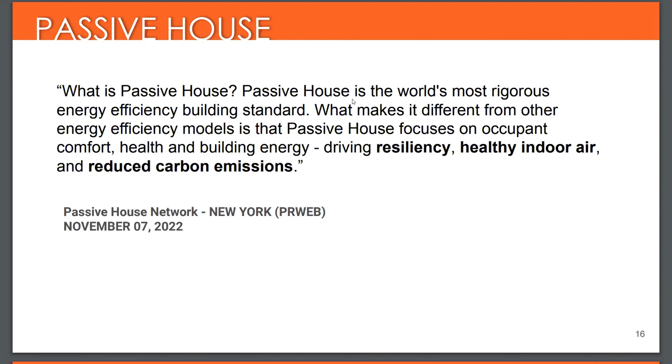There's some criticisms of LEED, which is a fine program, but you don't always end up with buildings built to the LEED standard which save energy, because it's a point-based system, and some of the points associated with saving energy are more expensive. And so you don't often find folks choosing the most expensive points, and you don't therefore end up with buildings which consume as little energy as they could. We think Passive House is a good step to zero net energy, because it's the first step to significantly reduce that energy usage.

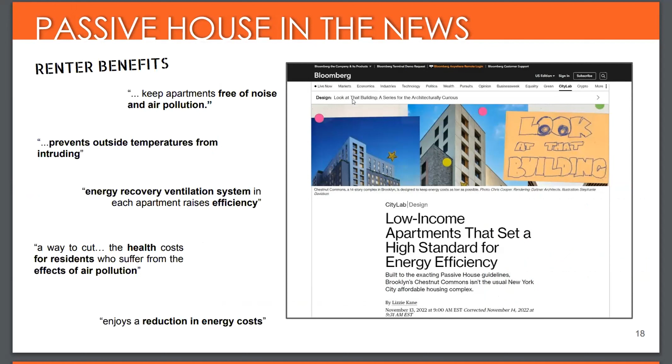If we want to read a little bit about what we know about Passive House, if you do a survey of articles that have asked renters about their experience living in buildings built to the Passive House standard, you see some commonalities, right? No drafts, no cold spots, fresh air, not overheating, they're energy sipping. This one, low-income apartments, it set a high standard for efficiency, free of noise and air pollution, prevents outside air temperatures from intruding, energy recovery ventilation for efficiency, more mention of health, better indoor air quality, another mention of reduced energy. It's a sanctuary, right?

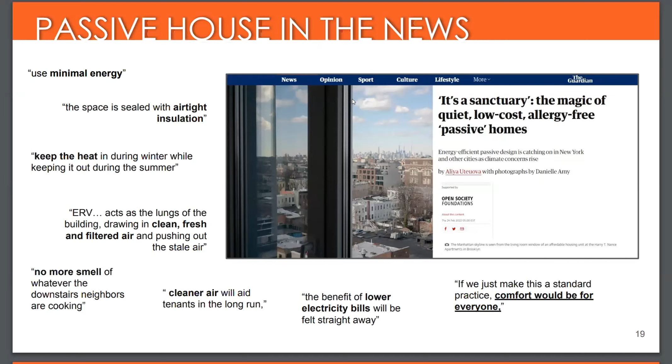And it does seem like magic to a degree. It's building science, but it seems like magic. Minimal energy again, airtight, keeps in the heat, clean, fresh, filtered air. So you see some commonalities coming out here. No more smell, cleaner air, lower electric bills. Comfort would be for everyone if this was made a standard. And you may never pay a heating bill. They're tightly sealed, improved air quality.

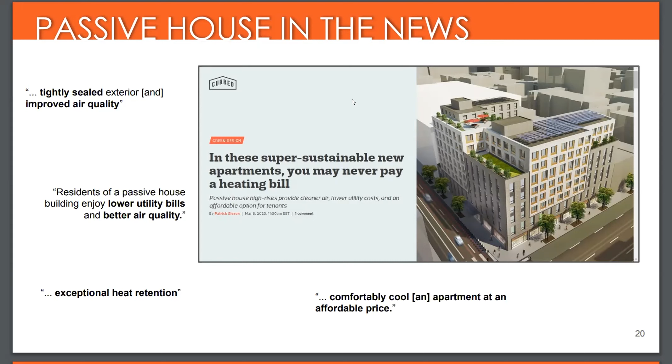I encourage any of you to just go out and do a search for Passive House and see what folks who have experienced Passive House buildings describe. And what you're often reading is really the tenant or renter's perspective, just as all these are: lower utility bills, better indoor air quality, exceptional heat retention, comfortable again. How are they doing this? How are they staying so comfortable?

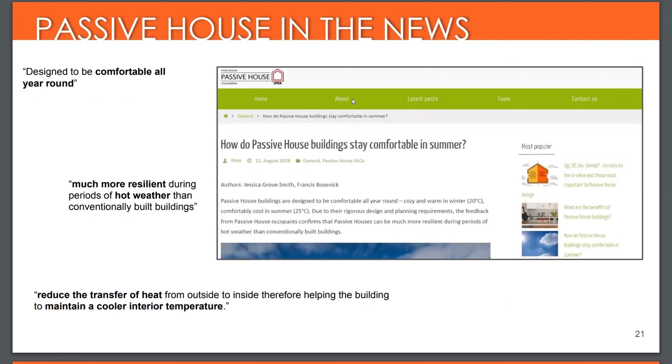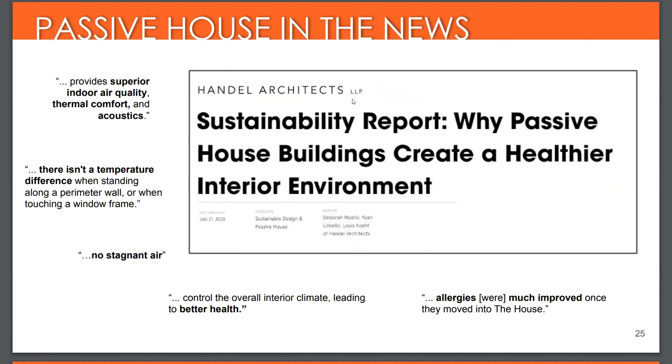Post-COVID, like a focus on health. The air is fresh. The air is filtered. And because we have balanced ventilation with heat recovery, you don't have the energy penalty typically associated with increased fresh air. So again, healthier, less... isn't a temperature difference. There's temperature stability and there's temperature persistence, right? Improvements for folks with allergies.

So what did we just hear in this survey of articles? Some are very recent, but it's all the same theme that you read about. We're hearing about themes of qualities of comfortable, healthy, durable, resilient, efficient. Well, comfortable is a renter benefit, healthy is a renter benefit. Durable arguably is both, but we'll put it in the category of owner benefit. Resiliency, right? A renter benefit, efficiency.

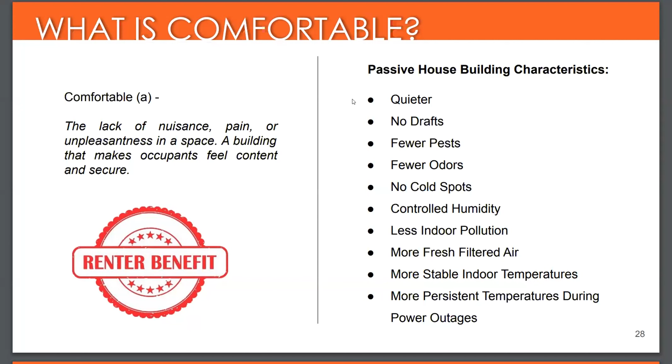So here's what we've defined: comfort, lack of nuisance, pain, or unpleasantness in a space, a building that makes occupants feel content and secure. We just saw a bunch of articles on Passive House. We saw these themes: quieter, no drafts, fewer pests, fewer odors. Every one of these is a direct benefit to the tenant, right? More fresh filtered air. We've seen issues with mold.

Smell is the sense most linked to memory. And for those of us who spent some time living multifamily, you remember coming down the hall and smelling what your neighbors were cooking. So some of these are top themes of concern for multifamily housing, like discomfort, allergens, pests, noise. And so the elements of Passive House that we bring are helping to address some of the major concerns, always in the top list of concerns for tenants. Healthier, right? Same thing, quieter, no drafts, fewer odors. So all of these, again, healthy buildings, all for the benefit of the resident.

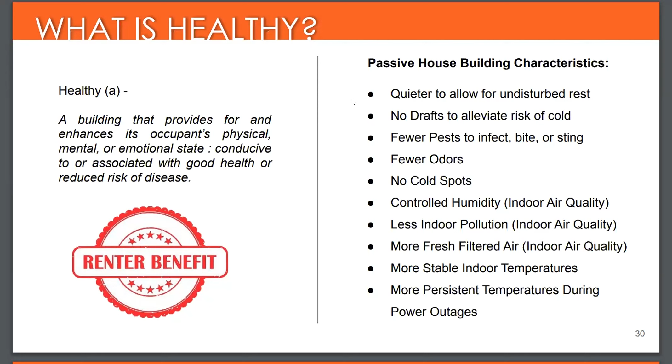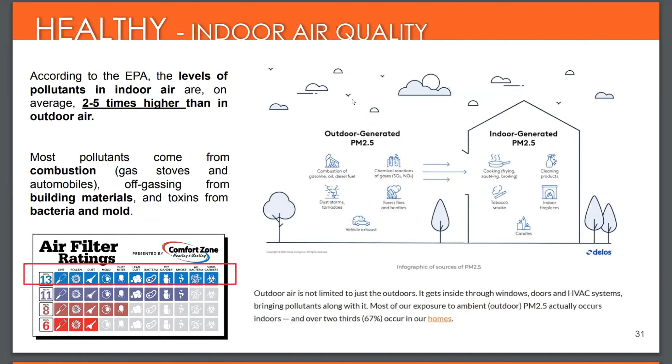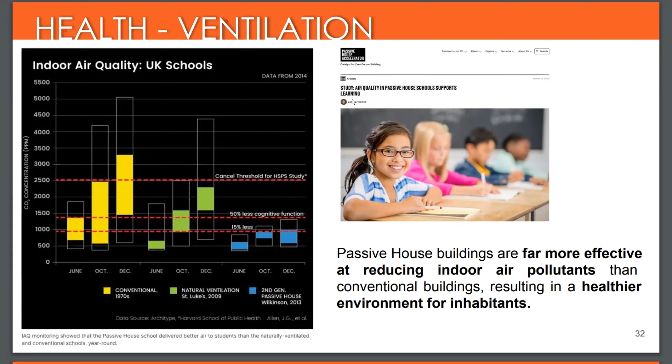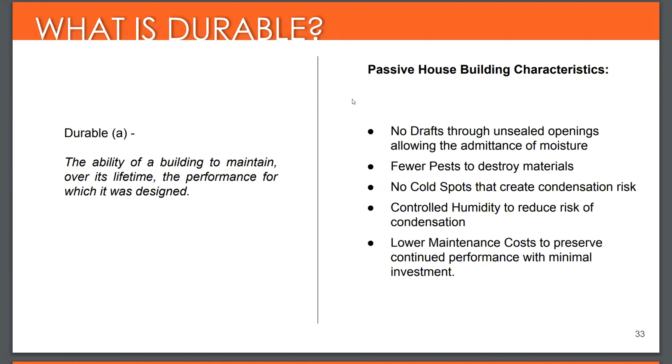I'm going to go through here quickly, but there are some studies out there that show that Passive House has fewer contaminants. Again, it's the idea that we have constant ventilation. We're filtering the air. We're always bringing in that puff of fresh filtered air. Other studies have shown that Passive House buildings, in comparison to other buildings, have far less pollutants in them. The data is readily available. Again, durability, probably more an owner benefit, but arguably if the building is more durable and we're not seeing a lot of these problems, they'll relate back to items like health and comfort that are tenant benefits.

Resiliency, right? Maintaining stable indoor air temperatures in resistance to extreme outdoor temperatures. So while folks on this call might all be very clear on global warming and climate change as the drive for why to build better, frankly, in a lot of the developer community, that is not something that is compelling to very many developers. Not me, but to many. And what we're trying to show here is that these benefits can flow to both the owner and the tenant. And some of these elements, like durability, that's the long-term maintenance of a building, the resiliency of a building, and not having your building become uncomfortable or uninhabitable.

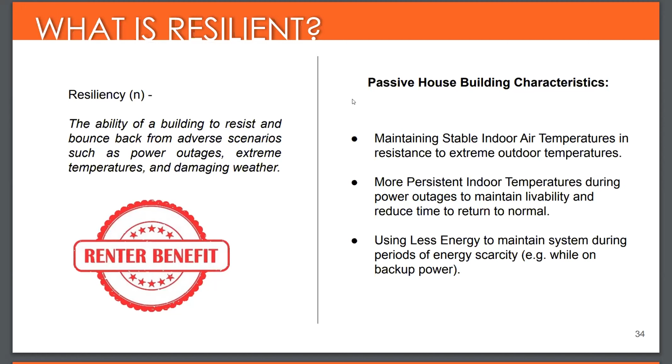Whatever the reasoning is, when I give this presentation, I don't focus on the causes of why the temperature outside is going to extremes. I think we all agree why and who's responsible. However, I don't think it's necessary when talking about the benefits of Passive House to get into causation for climate change. We could just agree that the temperature outside has become erratic and extreme. And what we see is that buildings built to the Passive House standard are better able to endure changes in outdoor temperatures, right? They're very persistent.

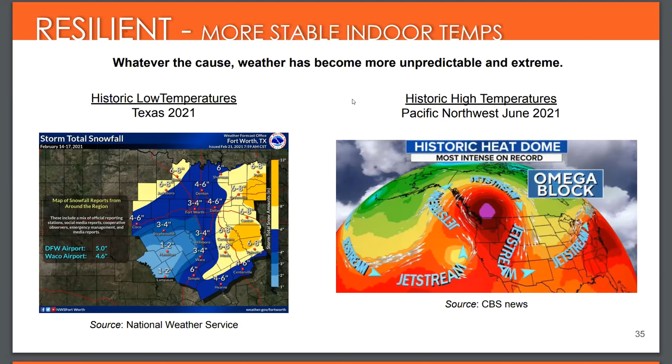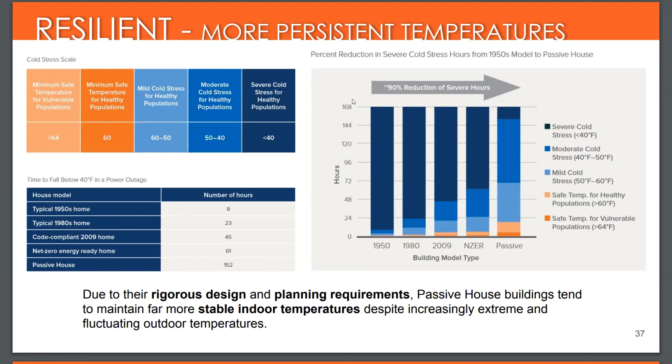Here's again a study that showed the Passive House was able to buffer cold temperatures more easily than buildings built to other standards. In other words, how long does it take from the time when you turn off the power? And they're having an episode of this, I believe, right now in Texas again, with another cold spell and power outage. And just as happened previously, homes lose their heat quickly and become uninhabitable. And they do that really quickly.

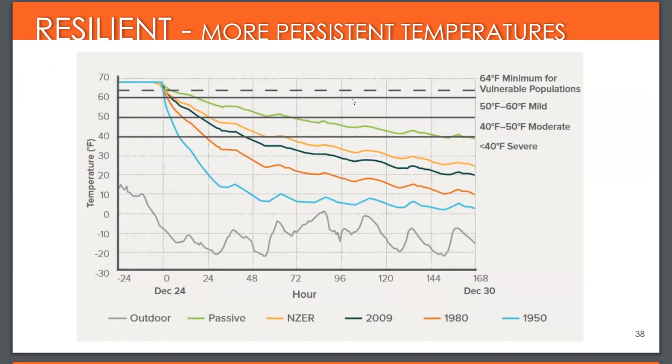In comparison to a passive house. This is an image that shows that the green line at the top is the passive house, and you see that persistence of temperature, right? So your home remains habitable for far longer than if you were built to another standard. So again, efficiency, there's the split incentive that was mentioned earlier, but one way or another, if you're not spending the money on energy, it's available either for the benefit of the resident and or the benefit of the owner.

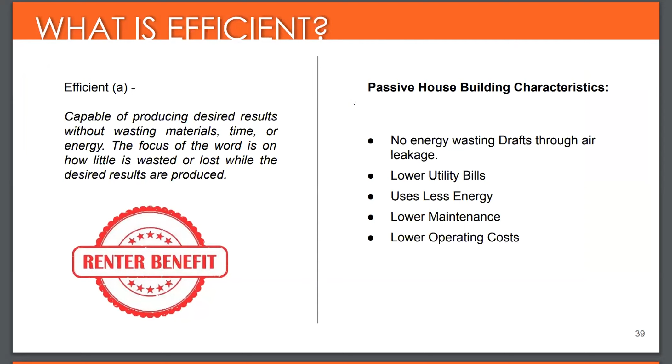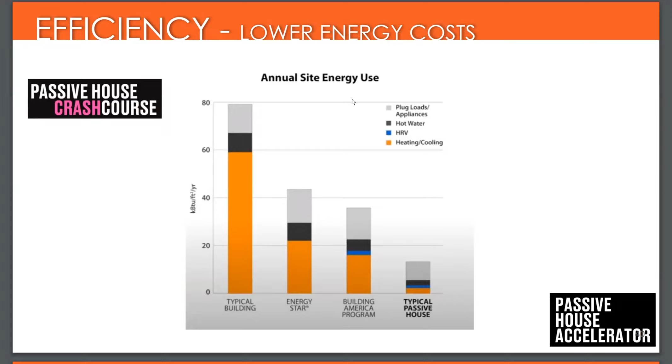And again, to give a little bit of context to passive house, zero net energy, in the passive house community, there's always a concern that you'll just throw more solar on it and the focus won't be on reduction of energy. Passive house is about that step to reduce the energy significantly, to lower the barrier for zero net energy. So I'm going to accelerate here.

We've seen a bunch of characteristics of passive house buildings: quieter, no drafts. I think this is 14 things. These are the themes, the characteristics that come out. Well, here are the elements that made that quality of comfort, or to make the building comfortable, right? We mentioned these buildings are durable. It's some of those same elements.

Resilient, right? Using less energy. So if we have a power outage and we're in an energy limited environment, using less of it makes us more resilient. And that persistence of temperature makes us more resilient. Healthy. And what you can see here, it's some of these exact same elements. Efficiency. And so putting it all together, we see that this list of 14 things really gets us a lot, right? It creates comfort, durability, resiliency, healthy, efficient buildings for just these 14 things.

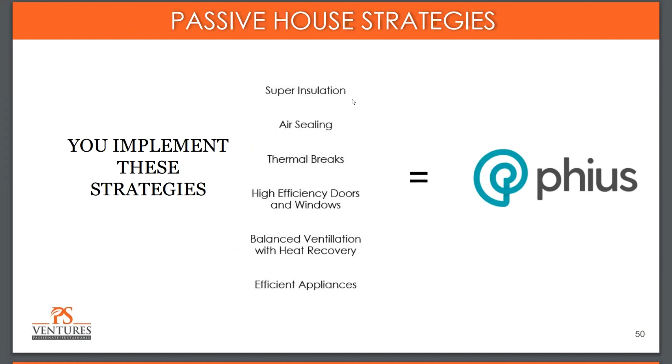Okay, well, just as we said, what makes a renter happy, and we think these characteristics are what makes the renter happy, then how do you achieve these characteristics? And the answer to that, we believe, is passive house. It's super insulation, air sealing, thermal breaks, high efficiency windows and doors, balanced ventilation with heat recovery, and efficient appliances, right? And here we see on the other side, super insulation gets you those elements.

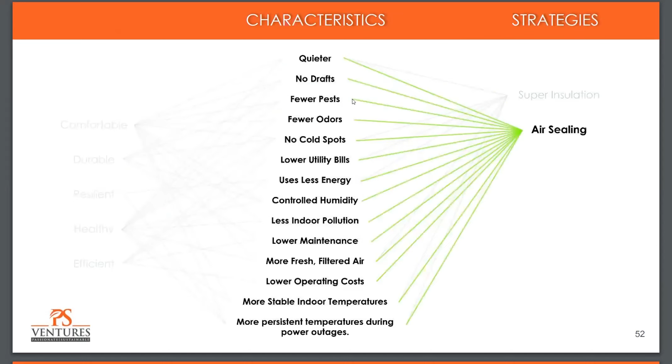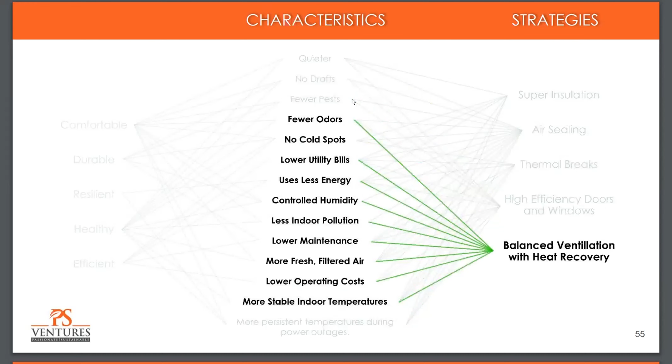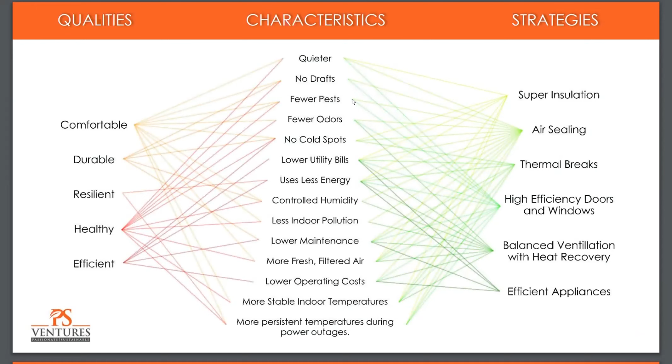Every item on the list is impacted by air sealing. What do thermal breaks get us? High efficiency windows and doors, balanced ventilation with heat recovery, and efficient appliances. And there we see them all together. So we have the characteristics that we think make a happy renter, which will, as we started with our premise, lead to a happy and higher net operating income for the owner. And passive house and the strategies that it provides are the way to get there.

Woo! Yay, Shane. So one of the questions I had for you was, what was your role in the Montgomery County policy, and has it passed yet, for all electric construction? Because when the local politicians were announcing they were going to ban gas in Montgomery County, which is one of the counties that borders Washington, D.C., they did it right in front of this job site. So how did that happen?

Well, our county tries to engage with the developer community when it can to receive feedback. And so the Department of Environment will hold stakeholder work sessions, which I've been a part of. I was part of a stakeholder work session for the adoption of the high performance tax incentive program. I was involved in the building energy performance standard enactment. So I think that the folks at the county understood what we were trying to do.

And again, mostly we would historically be doing this in the market rate segment. And so I think when politicians have seen the writing on the wall for the future of gas and the banning of gas, they wanted to highlight a project that was showing that it's possible. Because as you could imagine, being a developer who is supportive of banning gas and building to higher standards doesn't always make me the most popular developer among developers.